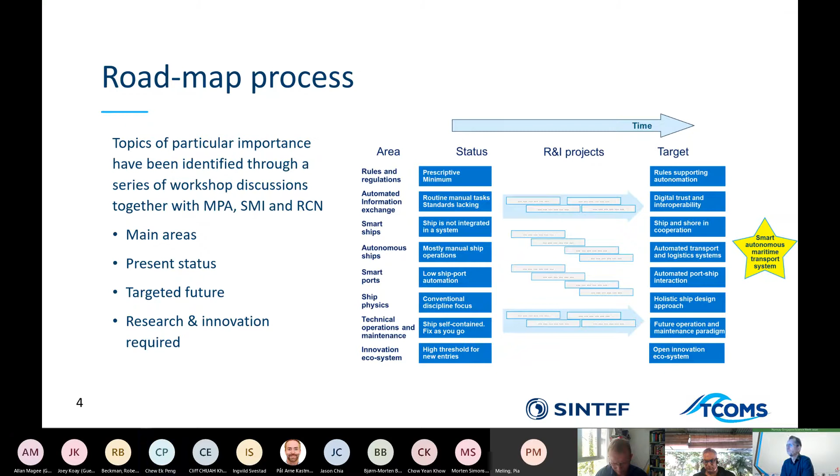So together with MPA, SMI, the Research Council of Norway, TCOMS and Sintef sat down through a series of workshops to formulate what we saw as the main areas of this coming development, and to share and communicate a common picture of development needs in that area. We tried to formulate a very tabloid status description. Where are we today? Where do we want to go in a given time perspective? And then we tried to formulate which development, research and innovation projects were required to move the industry from present status onto this targeted future.

So the next slide is the complete roadmap. As you can see, it's extremely busy. There's a lot of information in this. What I thought I'd do in this presentation is take you through each of these areas in the left-hand column, and discuss a bit on each of these areas what forms the R&I projects that we have projected in the middle part of this roadmap.

As with any kind of roadmap, the question is whether the roadmap or the process is the most important. But I believe that a common roadmap like this could also have quite a lot of interest, and it is a backdrop for sharing development processes and projects between many different actors worldwide. So the main areas: when we started looking into this, it was actually quite easy to come up with a consensus description of the dominating areas.

Of course, rules and regulations are totally critical in order to make such a change for the industry. International regulations, regional regulations, local regulations, and especially if you're looking at world trade, then this process towards common unified rules opening for autonomy for deep sea shipping could be the most challenging one. But rules and regulations definitely have to have a large focus with respect to further developments.

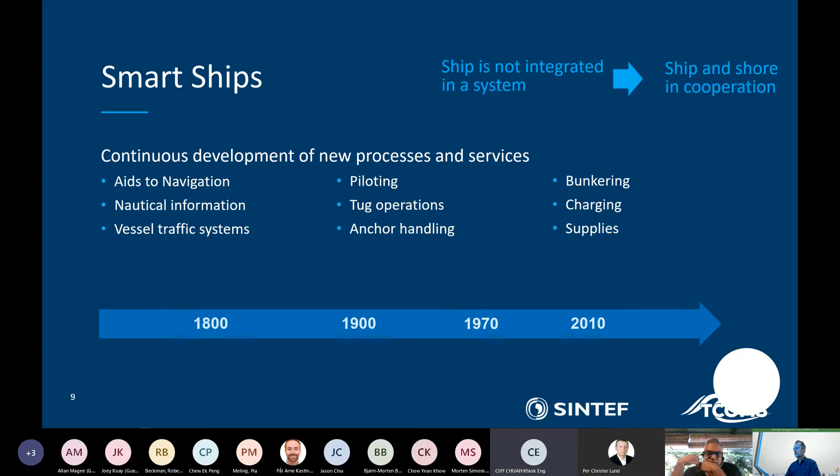Smart ships. This is the development that shipping is part of almost anyway. You can draw this timeline at the bottom from the 1800s with mechanized power, mass production of diesel engines, computerized control, and then shipping 4.0 coming. So the developments within smart ships are something the industry is well accustomed to. They've been reaping benefits from this for decades and centuries, and it's not going to stop. Autonomy or no autonomy, the development of smarter ships, more intelligent vessels, more intelligent communication is just the way this whole industry is moving.

Looking at this general part here, it's moving from ship as a separate entity more and more towards ship and shore in cooperation, and ship as a part of a fleet or as a part of a complete logistic system.

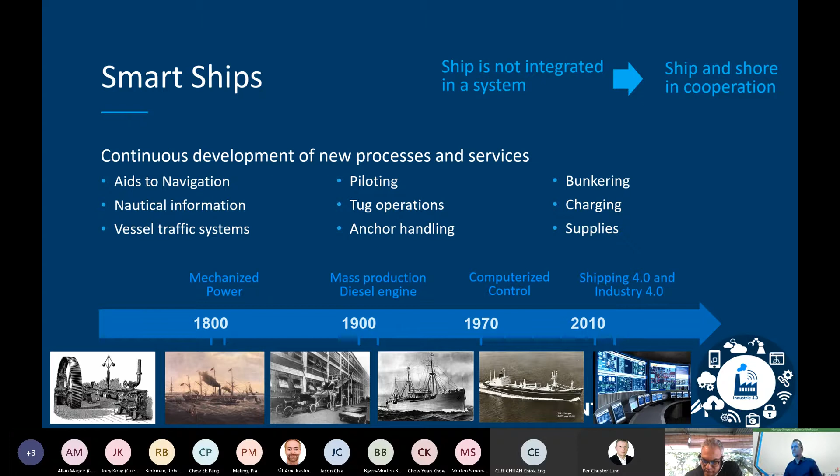Then the difference from autonomous ships, moving from manual ship operations to more and more of an automated transport and logistics system. Remote control centers for each ship owner, fleet operator, local control centers in each of the major trading hubs, local services supporting the remote control centers. The whole different way of setting up offices, setting up the internal communications.

Then, of course, sensor systems on board ships, aids to navigation, collision avoidance, and automation of a lot of the operational parts, automation in harbors, tugs, anchor handling, cargo handling. There's a whole range of developments that have started, are underway. For many of these areas, it's not fair to say this is something we see coming in the future. A lot of this is already well underway and has reached a piloting stage in quite interesting areas.

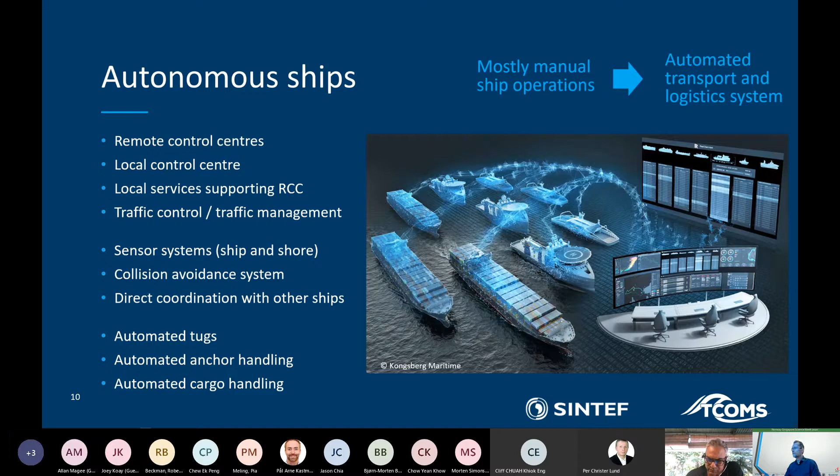And then, of course, the ports are the key to harvesting the full benefits of autonomy. In general, there is a low ship-to-port automation. Singapore is perhaps an exception in that. But then moving the whole trade to automated port-ship interaction would take quite a bit longer time.

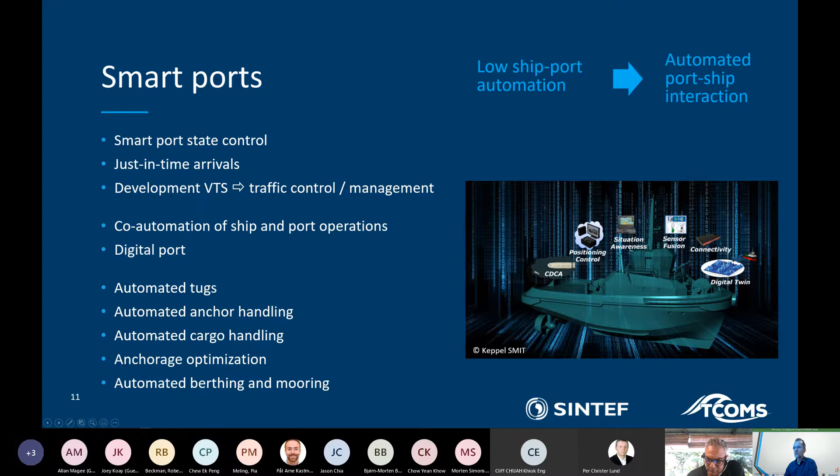But then automation of the port state control, perhaps what's most important is this planning of just-in-time arrivals, good traffic control, traffic management systems, co-automation of ship and port, digital ports, and then automation of the different operations, ship physics, digital twins, open simulation platforms, models for operation, models for ship-shore interaction, moving from a conventional discipline focus to a more holistic ship design approach.

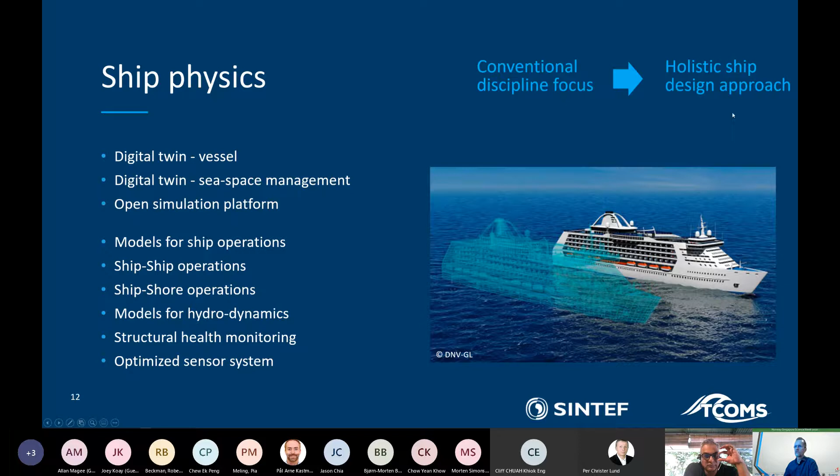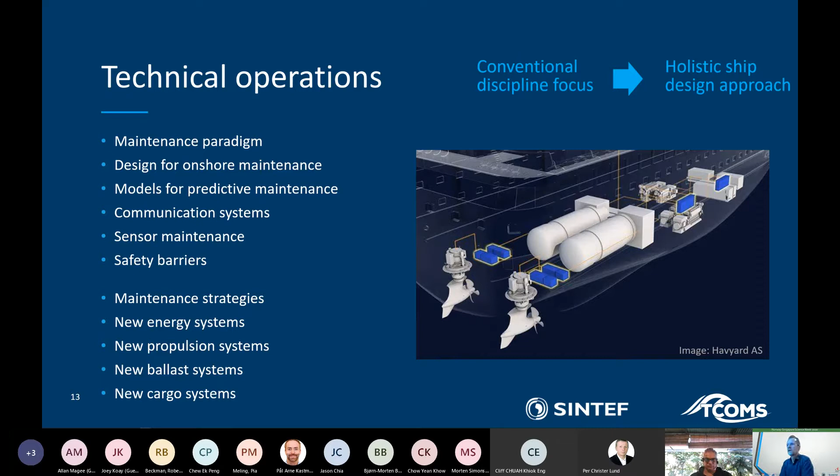Technical operations will have to involve a new paradigm for maintenance, since the ship will not be manned en route. The people continuously checking, double checking, doing all the smaller stuff will no longer be there. So the whole thinking of technical operation will need to be redone.

So there's obviously a possibility for standardization, a possibility for new services, a possibility for new companies moving into this new world. At present, we see a very high threshold for new service companies entering the scene. There is a potential with this transition to autonomous vessels that a totally new and open innovation system can be established.

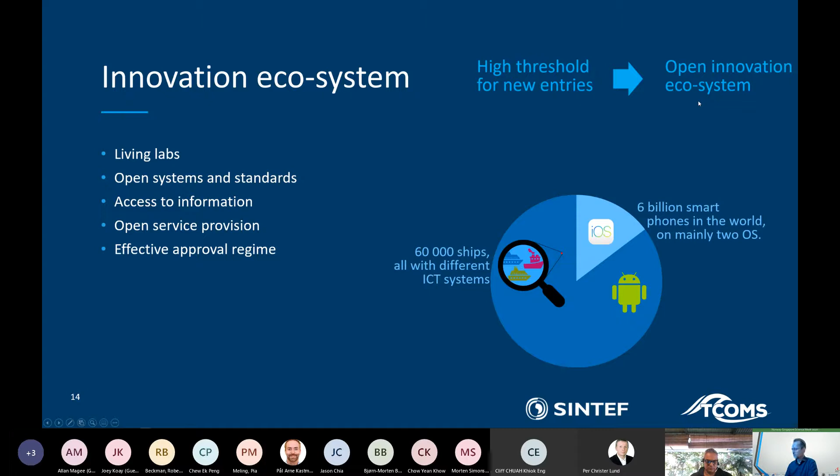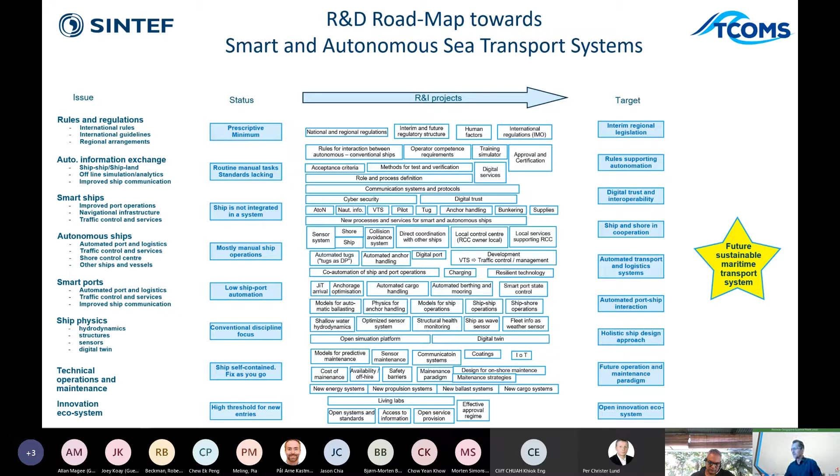And if we all move together and focus in on where each of us can really make a difference, having such a common perspective of how to move forward could then be a very valuable tool for coordinating information and for coordinating development projects in future.

So this was a very fast recollection or run through of a quite extensive work. I encourage all of you to download the full version of this roadmap from the websites of Sintef or TCOMS.

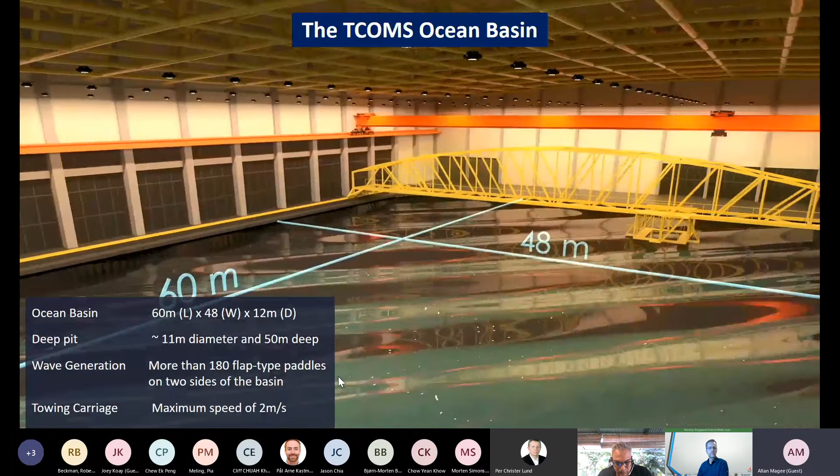A key component of TCOMS is the ocean basin, which is one of the largest in the world—I think second maybe to Sintef Ocean in Norway. It has a movable floor with a central pit that can go down to 50 meters water depth, so we can simulate deep water risers. It has an XY towing carriage, which can be used for towing and maneuvering simulations. And then we can generate waves and currents in different combinations to simulate the conditions at sea. So this is quite flexible and useful for all kinds of studies related to vessels as well as other structures floating in the sea.

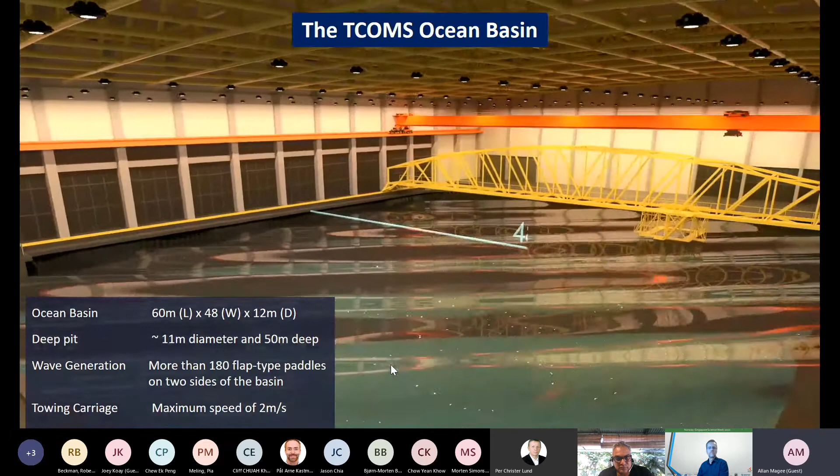As mentioned, Singapore is getting ready for the introduction of what we call MASS, Maritime Autonomous Surface Vessels or surface ships. TCOMS is working in connection with MPA, and the Singapore Maritime Roadmap includes a task on smart fleet operations and autonomous vessels, so TCOMS is working together with them. We know that Singapore's port is one of the busiest in the world—some of the largest and most advanced ships call here frequently. So Singapore has to be ready for the introduction of these new smart vessels and the technologies that are needed.

At the same time, there will be a lot of vessels entering this area, so in order to make those vessels safer and more efficient, we need to understand how they behave better and be able to predict things like vessel interactions in very tight operating environments around Singapore Straits. At the same time, we need to have some capability to assess the structural health of the vessels as they sail, and this will become more challenging with reduced manning.

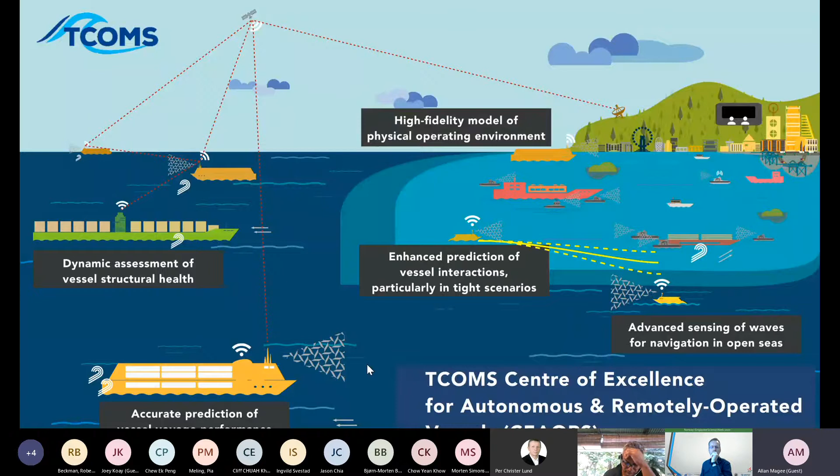So a lot of operators are looking at smart technology monitoring systems which can actually enhance safety and reduce the need for frequent periodic inspections. This can make ships more economical as well as safer over time. So these are the three things I will focus on in more detail in the presentation.

So how can we achieve this level of experience and good seamanship using an autonomous vessel? That's a very big challenge, and I think there's a lot of ship physics that need to be understood in order to reach that point.

This is some of the work we've been carrying out at TCOMS, building a captain's experience. Knowing that if you have an autonomous car, the environmental loads are relatively small, whereas with a ship operating in large waves, the inertial loading is very important and needs to be included in the model of the autonomous vessel.

Ships also take a long distance and time to maneuver. Up on the right, you can see the effect of current on a container ship executing a turning circle. On the left, you see the effect of a 1.5 knot current, which you might experience in Singapore.

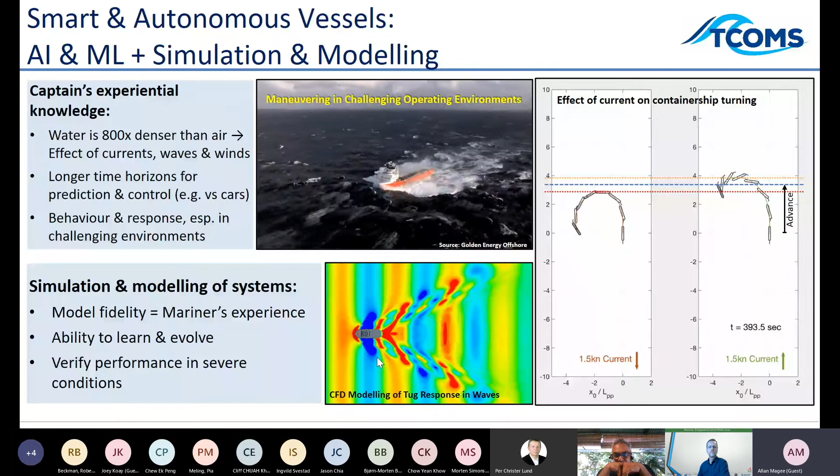A captain on board today is well aware of the situation and able to make corrections, maneuvering safely through experience. But for the autonomous vessel to capture that behavior, we need to understand a lot better how ships behave and also the effect of the environment.

Part of the development involves building a so-called digital twin of the hydrodynamic environment. This takes as input some of the global weather models for boundary conditions, and then provides simulations of environmental conditions around Singapore, eventually heading out into the South China Sea and perhaps other areas.

This could be useful for predicting, for example, whether there's a strong current today, and how that will affect vessel behavior as it enters into this very tight environment, so that we don't get any surprises or unexpected behavior.

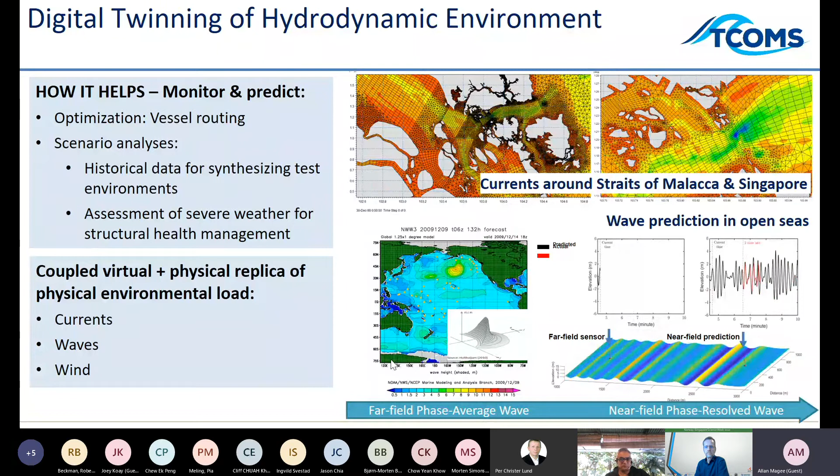This will be especially important when we have a mixture of autonomous and conventional vessels operating in very close quarters. So the physical model feeds into the digital hydrodynamic twin of the vessel to understand how it responds to the effects of the external environment.

We've been building hydrodynamic models for various types of vessels based on computational fluid dynamics. These are very large-scale simulations that take place on the National Supercomputing Centre, so they're really too vast and too slow for real-time controls.

So the way we manage this is we build data-driven, or reduced-order, models that capture the essential behavior in a few lines of code. This can then predict and be used to control the vessel under the influence of the complex environment we saw in the previous slide.

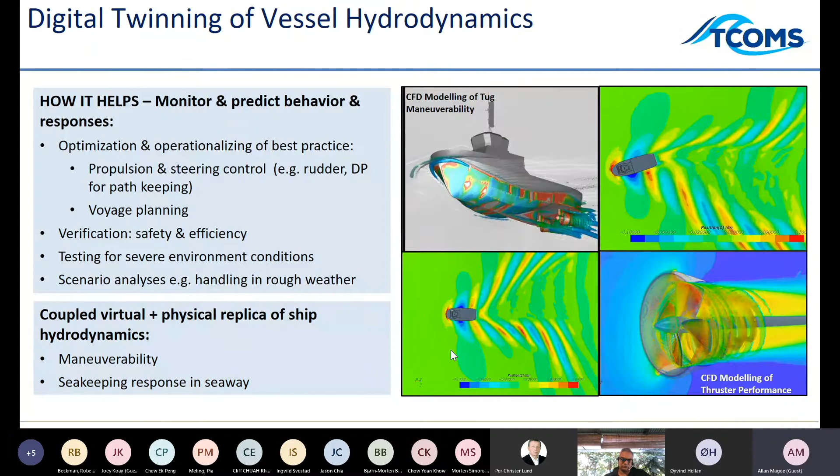Effects of vessel maneuverability, the interaction of hulls and thrusters, and maneuverability in calm water as well as in waves - this is one of the big areas that TCOMS and Sintef Ocean have been working together on for quite some time now.

As I mentioned, with reduced manning on board, you don't have people to understand the condition of the vessel. So how can we make sure it's safe after a storm goes past? Do we need to make repairs, or is it still safe to continue safely?

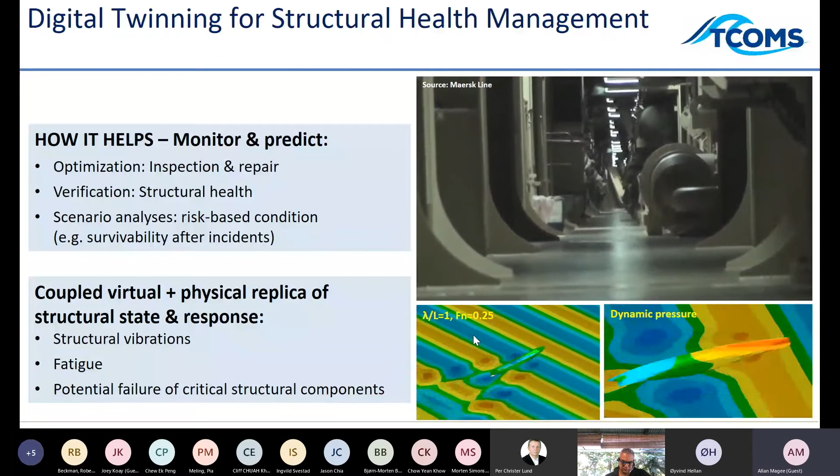This will require onboard sensors to monitor vessel behavior, as well as what we call a digital structural twin, which can predict the stresses throughout the structure based on a limited number of measurements. This can also help with long-term fatigue monitoring and provisions for dry docking, so we can know which areas to inspect first, depending on what seas and loads the vessel has experienced during its sailing.

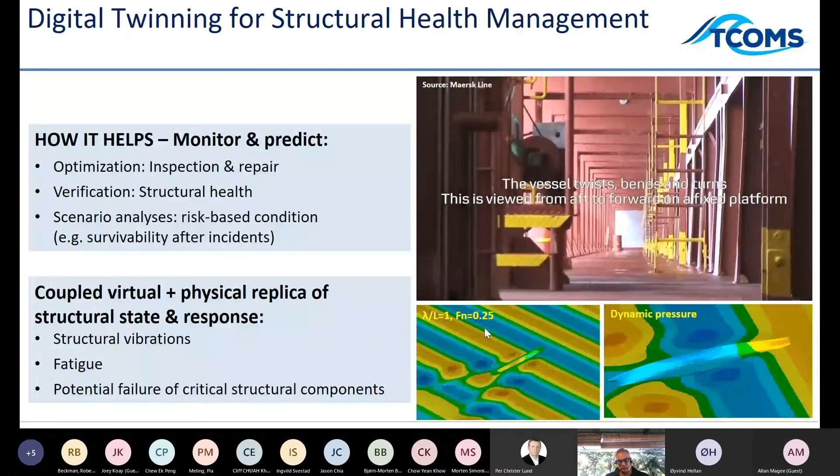So just to sum up then, the digital twin couples a virtual and physical replica of the real world system. It uses monitoring and prediction to enhance the understanding of the vessel behavior in harsh environments and in day-to-day operations. So it can be used for optimization, for verification of different monitoring systems. It can also be used to help

improve the operation. So, for example, if we can capture best practices from some of those experienced seamen, then we can perhaps gain knowledge about how to maneuver safely in more harsh environments, or how to operate more efficiently over time. So all of this requires a much better understanding than the conventional engineering that's used to design ships today. So TCOMS and Sintef Ocean will continue, I think, on this journey for some time to drill down and really develop the tools that are needed to enable this technology going forward.

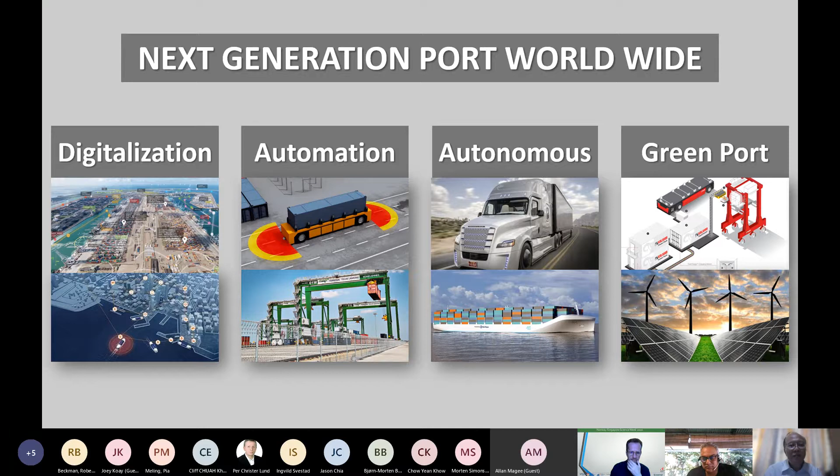So, like, what happened? Hold on. Somebody is trying to share. Is that, no, that's not you, right? No, okay, let me try to share again.

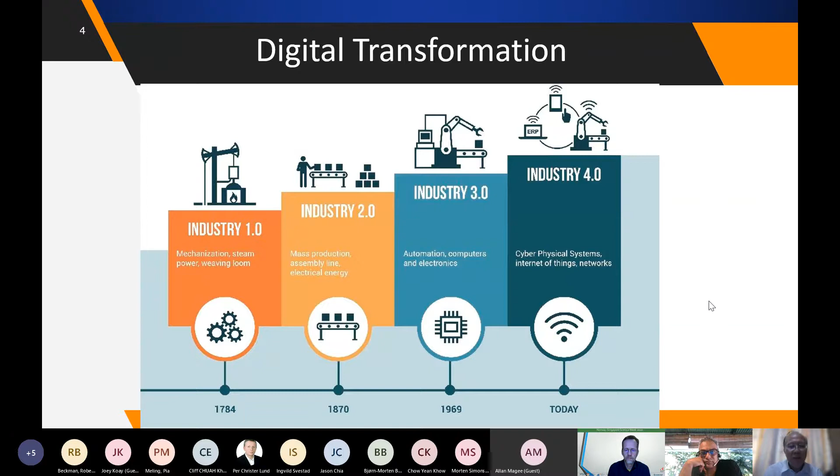Okay, so in this talk, I will focus my discussion on digitalization, especially in the area of digital twin, which was discussed just now, but this is more in terms of the next generation ports. And of course, we know that Industry 4.0 has made it possible for this kind of digital transformation. So I'm sure many of you know what a digital twin is. It's actually the digital manifestation of physical systems.

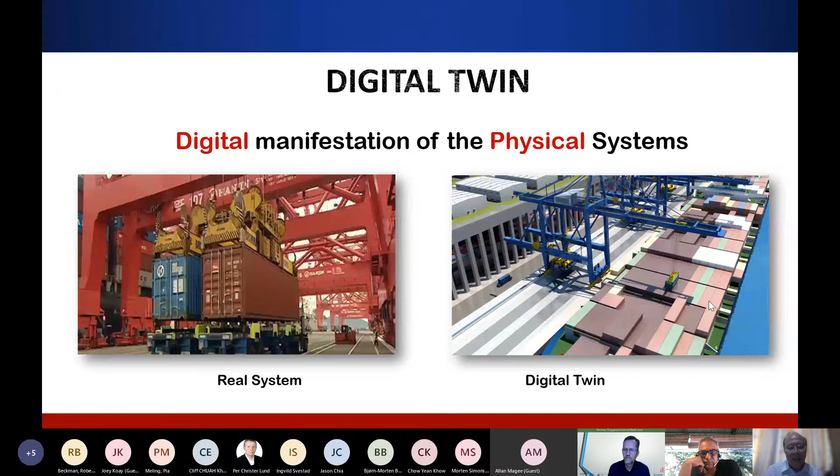And in order to build a digital twin of the port, we will need to model the actual dynamic behavior of the port, and hence the understanding of the port processes and the operation strategy, how they interact with each other, and the events taking place are necessary. So I'm sure many of you also know why digital twin is used. Industry 4.0 is an enabler, and so it's a key for digital transformation of many industries, and it's also getting increasingly popular as it's seen to drive many innovative solutions and to increase performance and profitability.

So the drivers that support digital twin development are that today we can see greater connectivity with more sensing through the IoT, cheaper and faster computing and storage, allowing for more powerful analysis and operational improvement, as well as faster communication, like the newly introduced 5G technology. And new automation technology, like Internet of Things, big data, and also use of artificial intelligence are important enablers to create a digital twin which can help the next generation ports to be efficient and smart.

So we know that there are many perspectives of what a digital twin is. Just now, Allan has also shared his part of the digital twin. So as we can see, a digital twin could be just a simple 3D model with IoT that shows the information of the system state, or in a more advanced model, data is collected to be used to describe the behavior of the system, like what Allan mentioned about collecting data to understand the dynamics of the system and then learn from there, where machine learning is applied to the historical data to provide information on future trends.

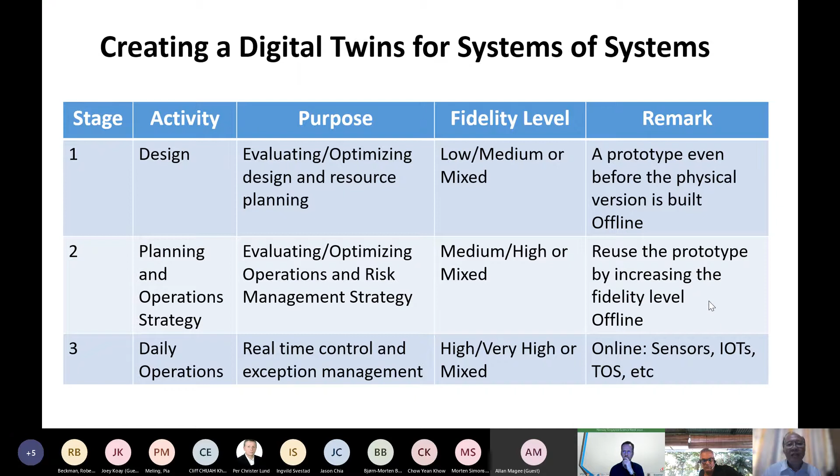So it should not just be a twin, but many twins for the same system, and it depends on the purpose. For example, if you can see, there are various activities when you design a digital twin. It could be for design, for planning the operations, for daily operations. So each of them have different purposes. And depending on the purpose, the fidelity level can be low or it can be high, right? So essentially, what I want to mention is that we don't just build a twin, but there will be many twins depending on the kind of study or the purpose that we want to have this digital twin perform.

One of the opportunities in having a digital twin is in the area of simulation analytics. So in the physical world, we know that we are bounded by space and time, and also the type of data that we can use to learn. But in a digital twin, these boundaries can be relaxed, and we can perform many types of scenarios, some of which have not happened yet. Moreover, we are not bounded by time, and we can get the answer within a short time.

Usually, when we try to understand the future trend, we use a machine learning tool, for example, to regress on the historical data to determine the pattern. However, it will not be able to extrapolate accurately if the points are beyond the limits. It will only work well within the limits of the historical data. So this is where the digital twin can help, as it is not only able to learn from historical data, but it has the capability to generate scenarios that have not happened before.

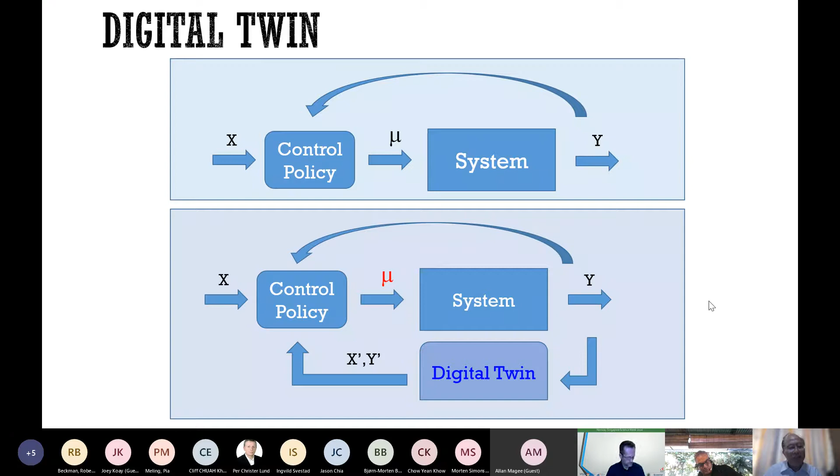Learning only from the historical data will not be effective because this method is reactive, and this type of learning has a lag effect. So it means that we are always chasing after the solution. The digital twin solution can actually help to address this because it makes the system anticipative by generating likely scenarios and evaluating the impacts of these scenarios before they can happen.

So in summary, the digital twin takes information from the historical data and current data from IoT and TOS, the terminal operating system, to show the system states and the impact if certain decisions are taken. It can also generate future optimized data from the scenarios generated from the digital twin. From these sources of data, they can go into a learning model to map the optimal decision space with different scenarios. This optimal decision space will be the super brain that can provide feedback to the decision makers with these scenarios. Hence, we are actually learning from the future for the future.

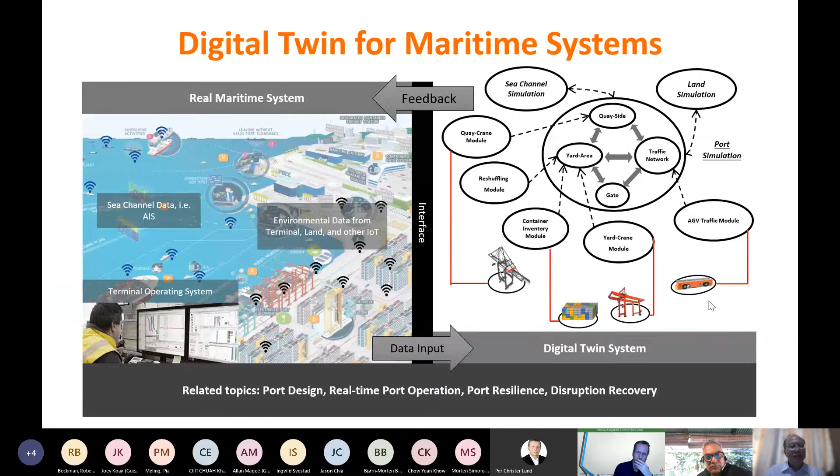So by using simulation analytics, the digital twin will be able to work hand in hand with the physical system to help the next generation port to be efficient and intelligent. As mentioned by Dr. Sanjay Kuttan, we have a Center of Excellence in Modeling and Simulation for the Next Generation Port, or C4NGP in short, to take up the challenge of developing this port digital twin. C4NGP is supported by the Singapore Maritime Institute, a government funding agency which has developed the Singapore Maritime R&D Roadmaps 2030 to identify capabilities needed to ensure Singapore's long-term competitiveness in the maritime space.

So C4NGP has developed an open source simulation platform called the O2DES, which is embedded with simulation optimization technology. Our digital twin will be built on this platform. Besides using discrete event simulation as the modeling technique, we have also embedded simulation optimization technology in the platform. They are the optimization in simulation, simulation optimization, and simulation analytics. Each optimization engine has its role to play. For example, optimization in simulation optimizes on the best operation strategies to be used. The simulation optimization helps to identify the best design configuration, and the simulation analytics helps to make decisions in real-time operations.

So our digital twin will sit on top of this platform, and it will be supported by visualization, such as a dashboard and 2D or 3D models to give insightful information. In addition, on the right side, we're also creating what I call Port XML, which is a universal markup machine language that can specify the configuration of the port. And by doing that, you can help to accelerate the model building of the port digital twin.

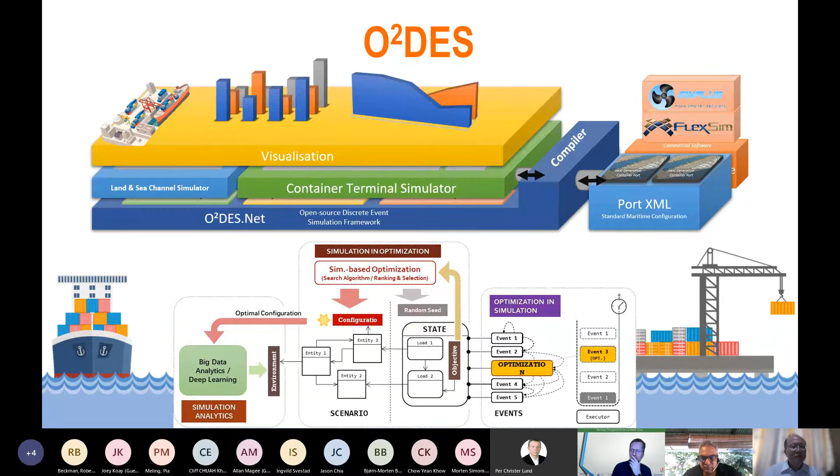So I would like to share with you two of our recent C4NGP initiatives. The first initiative is the Port XML standard, which I just mentioned is a set of universal markup programming language for configuration of the ports. In order to establish it as a standard, we have recently set up a Port XML Alliance. The Port XML Alliance will comprise academia and researchers, developers, companies from the port and maritime industry, and port authorities. With this critical mass, the Port XML Alliance will seek to push this markup language to be adopted as a new international port and maritime machine language standard supported by international organizations such as ISO or the United Nations.

Here is the example of a Port XML standard, which shows the markup language to describe a yard block. So this is essentially what we are trying to push with this standard. And of course, there are benefits by pushing these standards. First is that it can help to accelerate the building of the port digital twin, and hence cut down on time, improve labor efficiency and reduce operating costs.

Second, it will establish a common working platform to enable compatibility among all stakeholders in building digital twins in the maritime and port industry. And the third one, which is very useful, is that it allows portability across different digital twin platforms.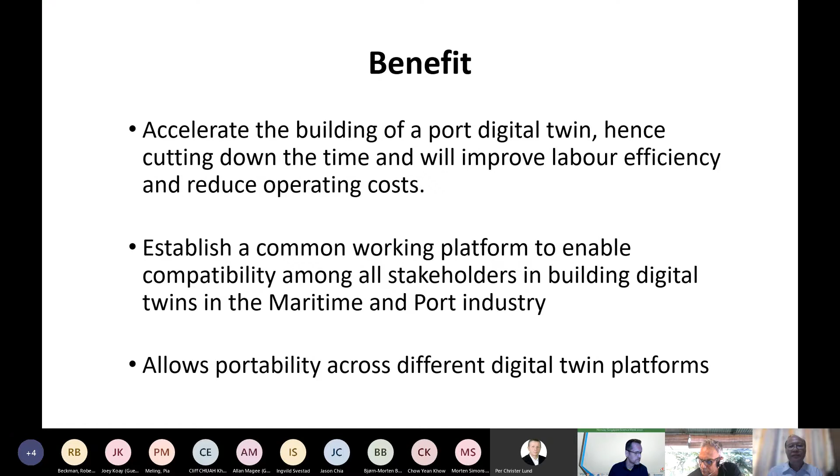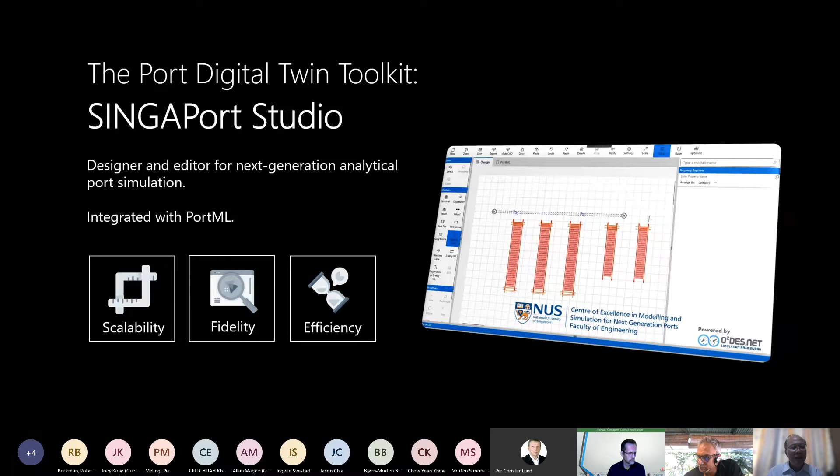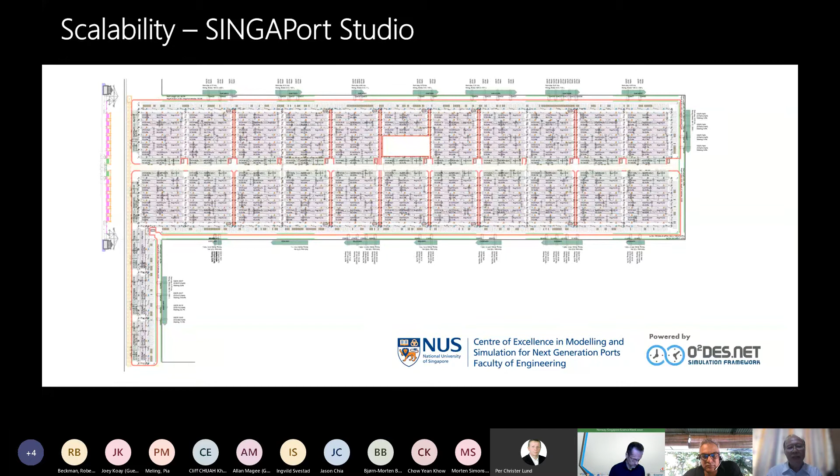The second initiative is the SINGAPort Studio. The SINGAPort Studio is our in-house built software tool to support the model building of the digital twin model with user-friendly interfaces. It contains libraries of port modules interfaced with the O2DES.NET platform and built around the PortML standard. It is scalable. For example, for the digital twin of one of the fingers in Tuas, it takes 5 minutes to compute for one simulation day, which contains millions of events to run.

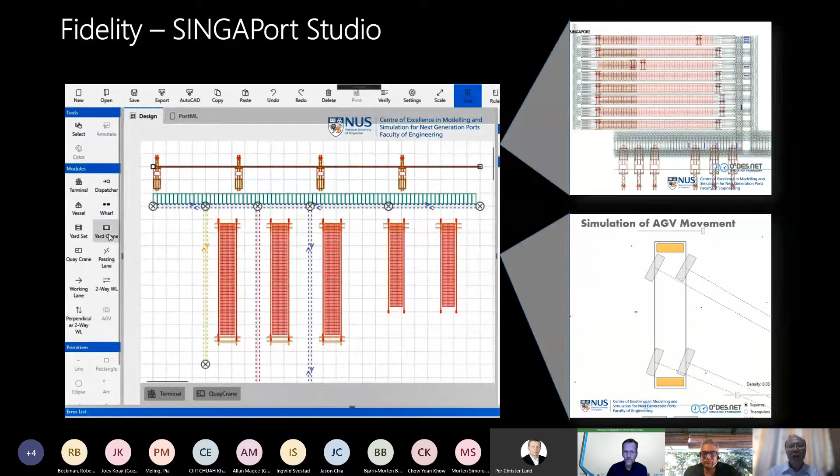So SINGAPort Studio also allows the digital twin to be built at different levels of fidelity. For example, for a quay crane, you can actually model it by looking at the actual movement of the trolley, the acceleration, the deceleration, the actual dynamics of it. On the other hand, you can also model the quay crane as just a distribution of the cycle time of loading and unloading. So it can have a high fidelity and low fidelity level as well.

Third, the SINGAPort Studio is built to be efficient, and as the modules are detachable, reusable, and reconfigurable, it allows the digital twin to be built faster. It's also designed not only to evaluate a design, but it's able to find the optimal or good design.

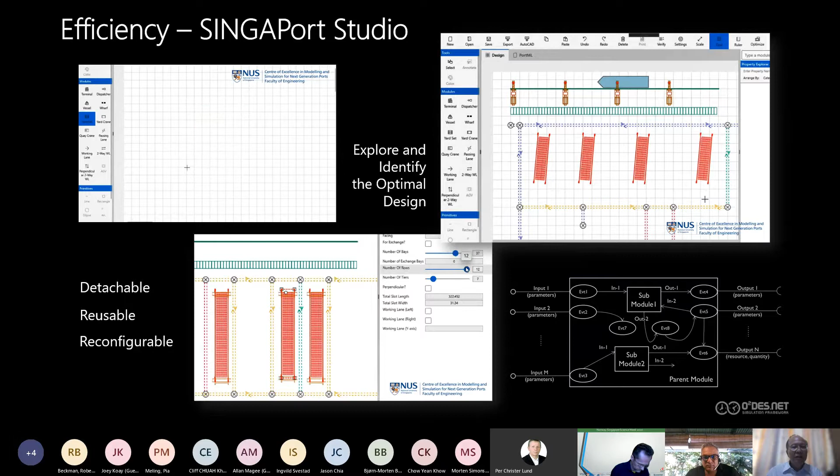As mentioned, the SINGAPort Studio is built around the PortML standard. It is able to read the PortML of a port and convert it into the port digital twin. And if the port digital twin is built by the SINGAPort Studio, it will be able to convert it to the PortML of that port.

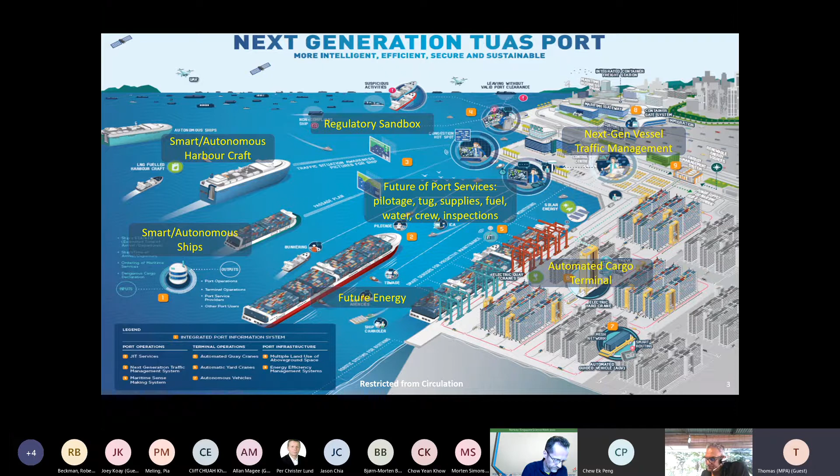And therefore, today, a lot of these MASS-related projects are actually relating to harbour craft. And we believe that these harbour craft projects will give us very useful data, learning and experience in terms of the challenges and the new concepts of operations that are possible. So to take one step forward, we also set up a Living Lab together with our partner port operators, PSA and Jurong Port, to try out different concepts of operations.

On the MPA end, basically what we set up is, I would say, on 3 fronts. One is the regulatory sandbox. Basically, this is a set of guidelines to guide companies towards testing of smart and autonomous ships. We also set up digital and physical infrastructure. We don't have the luxury of space in the port waters to allow a dedicated area for autonomous ship testing. But we do demarcate some of the areas at certain times so that certain testing could take place progressively. So that's on the physical front.

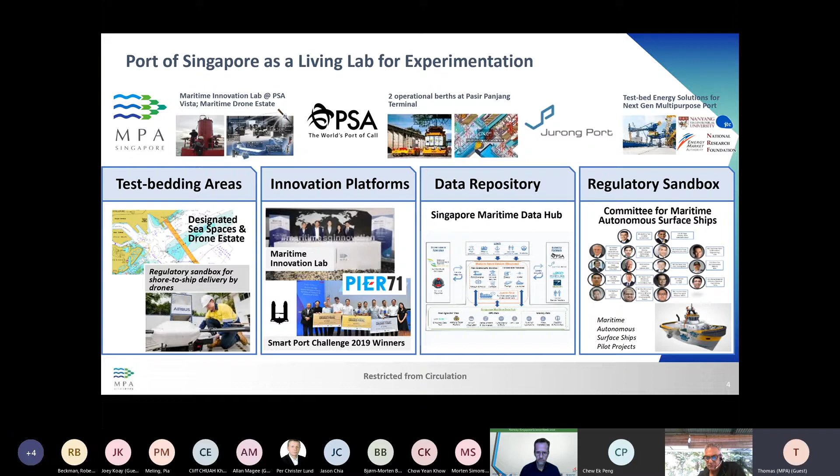And on the digital front, we have been trying out different communication technologies with different providers, and also set up the data hub to allow access to historical data as well as existing data in terms of ship location, navigation, speed, course, because at any one point in time, there are like 1,000 vessels in the port waters. So these all provide a lot of very rich information and scenarios for companies who want to do modeling simulations; they can use some of these data to try out their algorithms.

So in terms of how we look at it, not just MASS, but the smart ship value chain, there are many stages of development, and definitely lots of opportunities for researchers and tech developers to look into. And the very important first step is definitely use case identification, because that defines everything. You need to choose the right use case where it brings value to the users, to the stakeholders involved. Not just doing autonomy for autonomy's sake, but it must really bring benefits.

And I think many of us agree that today the conversation is not so much about removing the manning from the ship, but focusing a lot on enhancing the safety of the ship and the crew, enhancing sustainability and emission reduction, and also productivity and cost reduction. More from those angles when we look at the subject of autonomous shipping.

And once the use case has been identified, then it comes to what the future new concept of operations is going to be like when the ship comes into the port in terms of taking services and doing all the regulatory reporting. I think today a lot of the load is on the masters, the crew, and the shipping agents to do a lot of reporting, a lot of coordination of activities, a lot of communication amongst the different parties. So to bring value to these people who are facing challenges and problems, we believe autonomous shipping must not only look at autonomous navigation technology alone, but also at a lot of other aspects in terms of communication, handshaking with the shoreside operation, the coordination between masters and the port, and many other aspects.

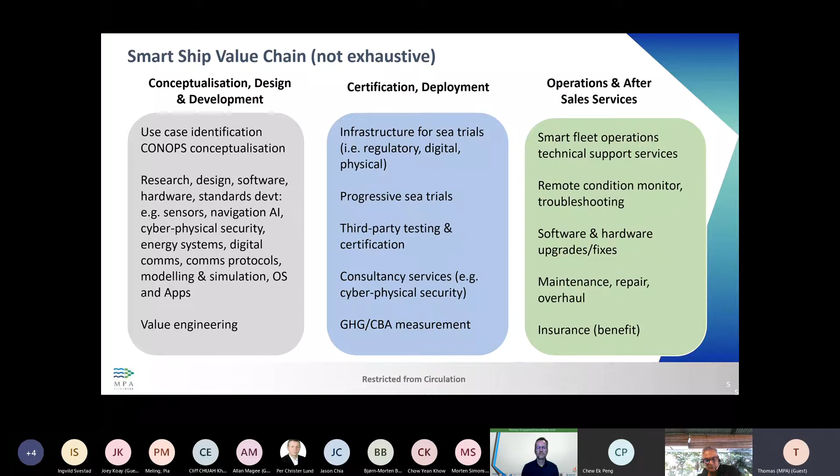sea trials. And finally, after deployment, of course, there will be operations support and after-sales services to support the smart ship operations. And these are all the so-called business and technology development opportunities. I would just say that this is not an exhaustive list of services that are possible.

Let me move on to the progress of the projects in Singapore. Just now I talked about how a lot of our projects are focusing on harbour craft, mainly in these two classes of vessels, which are the tugboat and the flotsam vessels. These are basically small crafts that collect rubbish and garbage floating on the waters. And for clear reasons, because it provides a good value proposition.

Today, I think the crew on the tugboat, besides operations, also spend a lot of time in the waters navigating from point to point. So most of these projects involve autonomous navigation with collision detection and avoidance, navigating from point A to point B. And some of these projects have actually successfully completed. Of course, some of the technology they have incorporated includes AI, sensor fusion, all those things.

What is probably not in place yet is wider-scale deployment, because today I think the cost of deployment is still quite high. While the concept of operations is proven to work in terms of collision detection and avoidance, the cost of deployment is at the stage that the operators still need to overcome this issue, and hence there's a need for value engineering to reduce the cost of the autonomous technology.

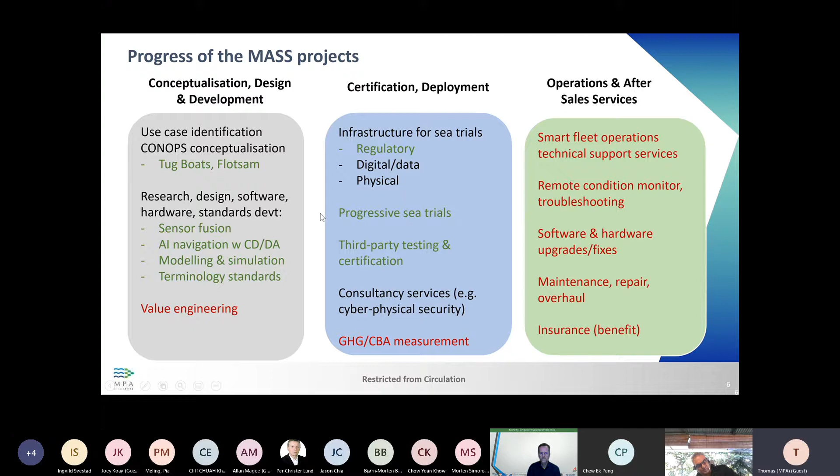In terms of the things that we put in place, I have colour-coded them. So basically, the green ones are the developments in Singapore that more or less we have already done. We have achieved some progress in those areas. Those in black, I can say, are still a lot of work in progress. And those in red, we have not reached that stage yet.

And it's not just only about the development in Singapore, because ultimately when companies do technology developments and operators deploy new technology, they also need to know that whatever they have invested in is not only for one single port. And therefore, we also set out to align and harmonize a lot of this discussion with like-minded ports around the world who are willing to be involved in this MASS discussion.

We set up a MASS port network with various ports around the world to basically look at the development of detailed guidelines and conditions for MASS trials and testing in the port, and to establish common terminologies and communication standards for ship reporting and data exchange. Basically, it's to allow interoperability when one vessel needs to call at not only the Port of Singapore, but other ports.

And we also want to facilitate a possibility where, if any companies in future want to do a port-to-port call between two ports to test out their MASS vessel, these are the ports that will be more ready to facilitate such a sea trial.

And this is my second last slide. Some of you are aware that Singapore and Norway, every 2 or 3 years, run a joint R&D grant call to incentivize the research community from both sides to do joint projects. And from our end, we also set up centres of excellence in various areas of the next generation port, as Prof. Chu has shared. In the area of autonomous shipping, we have set up a centre of excellence for autonomous and remote operations under TCOMS at NUS, which also jointly published a roadmap with SINTEF, as mentioned earlier.

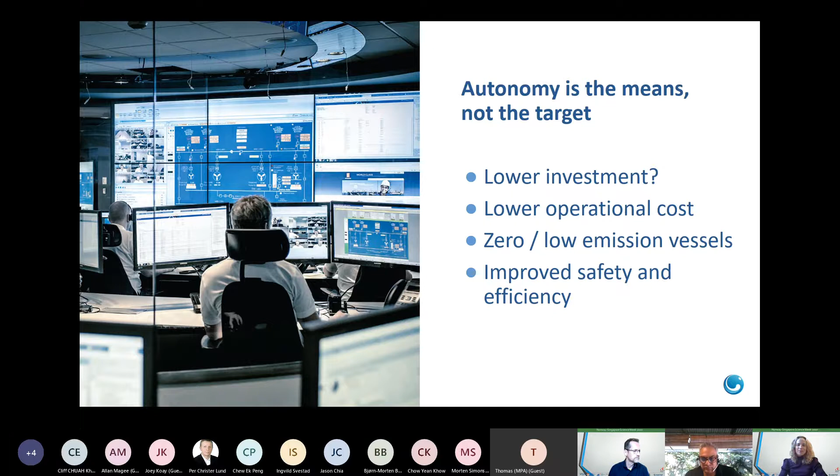And then one can discuss the safety aspect, has been mentioned before as well. There's quite a lot of accidents today that are due to human error of some kind, and at least those might be reduced, while of course we are introducing new risks as well. We have to be aware of that. But we believe this could definitely improve safety and efficiency as well.

But it's level 4 we're looking at, and we are cooperating with not only the authorities and the individual class societies, but also the University of Southeastern Norway, specifically on what competencies are needed in the Shore Control Center or Remote Operations Center. So actually they are now starting a curriculum. We will test it with a few people now already in November on a specific training program for Shore Control Center operators. So we're getting into more practical details.

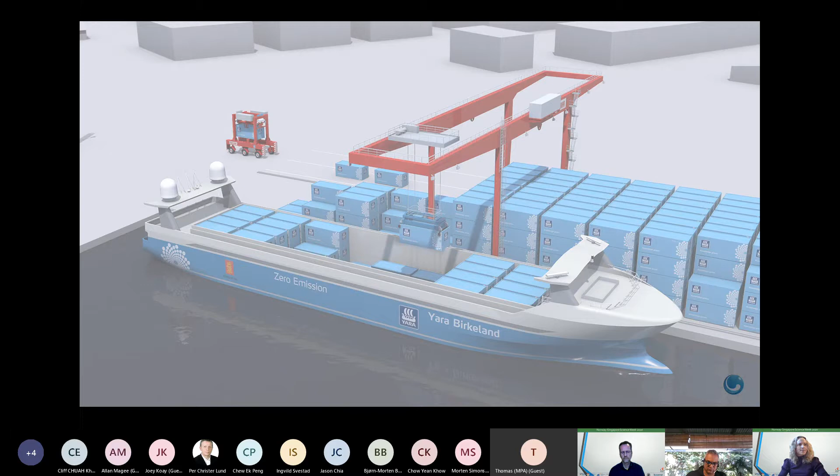You have probably all heard about this vessel. It was the world's first unmanned container vessel, zero emission. It was launched by Yara, the fertilizer producer. It's quite an ambitious project. It has been a little bit delayed because of COVID, but it's now going ahead.

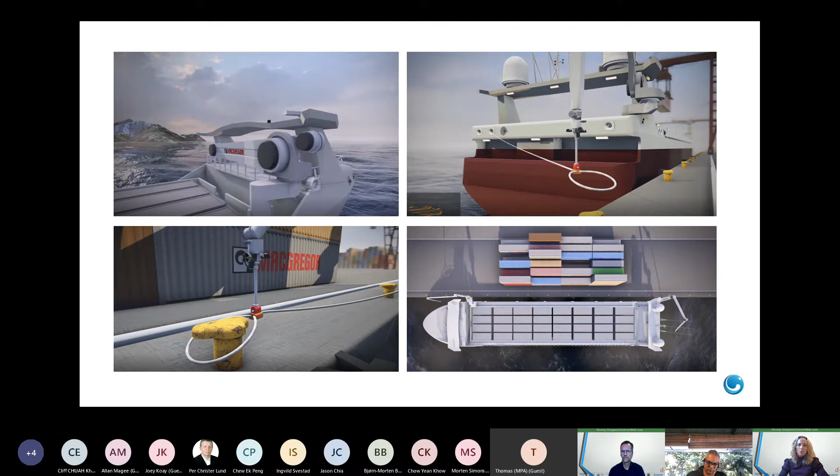This is an example of another task that has been automated on board this vessel. MacGregor has delivered a robotic arm that will do the mooring instead of people doing it. This is probably a one-of-a-kind solution at the moment. There are already different mooring solutions that require port infrastructure like vacuum or magnet mooring, but this would work in any port. That's the idea.

The vessel is now in the Vard yard in Norway, in Ålesund, where she's undergoing sea trials. Very soon she will be ready for the first tests, but it will still be a while until Yara can put her into operation, because they need to finalize their port side investments and changes as well. But the vessel is soon ready for testing.

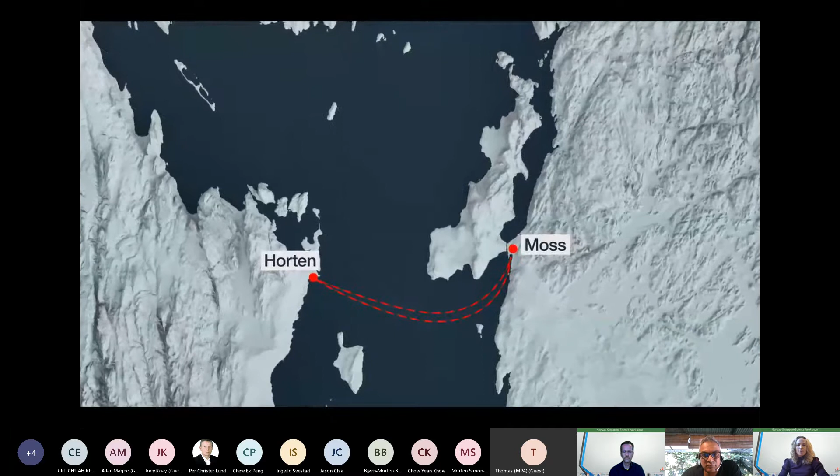Now this one is another cargo owner called ASKO. It's a large grocery distributor in Norway. They have around 800 trucks on the road every day. But instead of driving the trucks all around the Oslo fjord, they're going to cross here with these 2 unmanned and 100% battery-driven vessels. These vessels can take 16 trailers each, and it will be unmanned in the end, and they will be picked up on the other side by a driver and taken to the final destination.

This is quite interesting because ASKO is just a cargo owner, they have no maritime experience at all. Now they have started a company called ASKO Maritime, and they have signed contracts for 2 of these vessels that are currently being constructed in India at the Cochin shipyard. And they are becoming ship owners.

This is an example of what was mentioned earlier by Øyvind. I think this is changing the game a little bit. Instead of them waiting for ship owners to come with the solution they're looking for, they're now taking full control and they're owning these vessels.

They will be replacing 150 trucks daily on a certain distance and actually reduce CO2 emissions by 5,000 tons per year. This is the main reason for ASKO, they want to have a zero emission logistics chain. They're very concerned about their CO2 footprint, and they have ambitious targets for that. But they also see that they can get a much more efficient logistics chain.

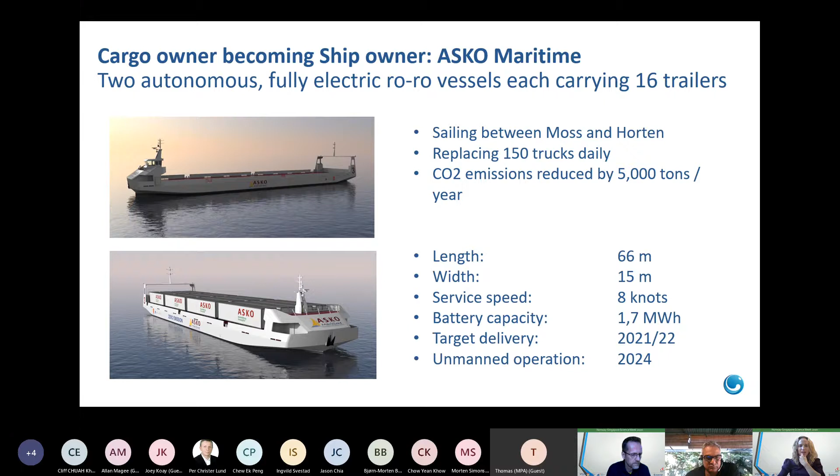And now we're doing site management, new building management, and project management for ASKO. We have to do a lot of remote supervision because of COVID, so that's also interesting, it's a new way of doing that. This is an example of disruption, that we can offer roles that were not there before in this setup.

This is a test with switcher tugs, and I know Singapore has similar testing on remote control tugs. This is not autonomous, it's one person remotely controlling one tug, but it's still a very interesting business case, because these tugs spend most of their time just waiting. Having people on board sitting there just waiting doesn't really make sense for anybody, so looking at doing that remotely makes sense commercially as well.

There are already a lot of autonomous unmanned vehicles out there, both underwater and surface, of smaller kinds, used for search and rescue, mapping the seabed, and doing different surveys. This top left one is Kongsberg's Sounder, which is also commercially used to find fish. So that's another use case of autonomy.

In Norway we also have the Norwegian Research for Defense looking at autonomous minesweepers, which definitely makes sense, because why put people into a risky situation like that? We could also look at remote controlled firefighting vessels for ports — a lot of waiting time like with the tugs, and of course a dangerous environment once you're there putting out the fire. Why put people close to flames and toxic gas?

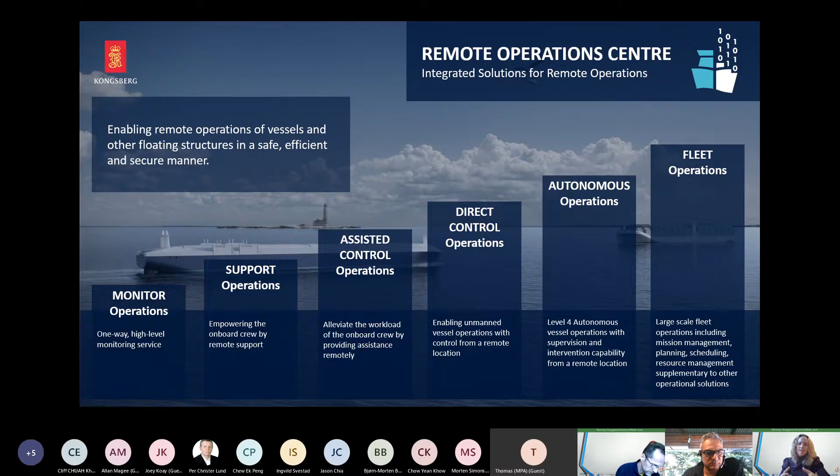In Kongsberg's facilities, they started testing this already a couple of years ago, and this is the King of Norway — he visited, very interested in the technology.

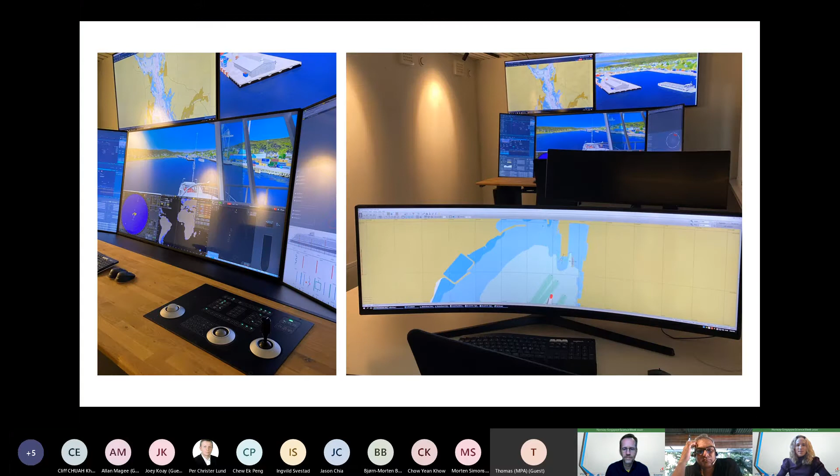Now we have set up a desk, just a simple desk inside our office in Massterly outside Oslo, where we're testing out what would be the best user interface. This is the first setup of that, where you have the bridge view here, and more of a bird's eye view in the top right corner.

We have the sea-scope, what the VTS will see, on the left top corner. And you would have a list of your vessels and their schedule here. And you would have on the right side a health status on all the equipment on board. And radar, ECDIS, and conning are mandatory views that you need to add as well.

But we don't know yet how this will be as a working environment, and we need to test that. Of course, we're doing that in research projects with various partners, but I guess the real testing will be when this ASKO or Yara vessel will be in operation and still with people on board, but we will have somebody in this remote operation center monitoring and testing how it would be to have the responsibility.

And this is my last slide as well. Also, as has been mentioned by several of the speakers, we need to focus on more than just the vessel and the sea transport. It's the whole interplay with all the stakeholders, and especially the whole logistics chain. If we're talking about goods, we need to make all of this information somehow available and optimized.

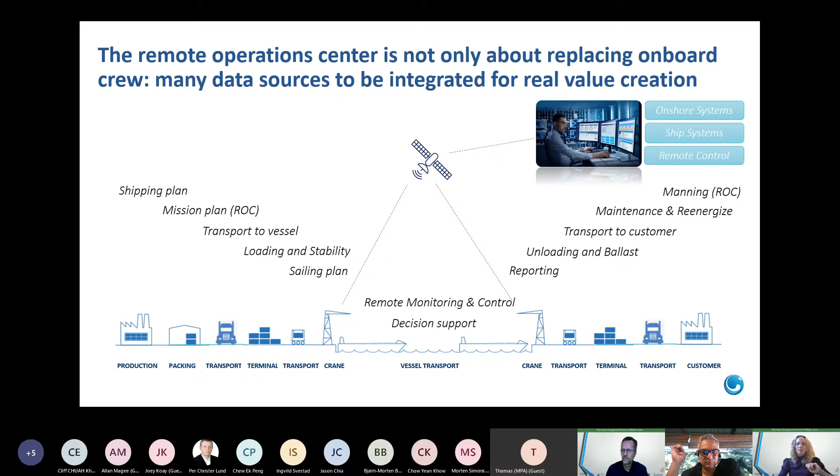And I think the remote operations center could have a good role to play in optimizing more than just the vessel transportation. So we need to collaborate with the ports and with shore transportation to make sure of this. And of course, we are looking forward to cooperating with Singapore, who are very advanced in this field, and we hope that we could get some good projects running together.

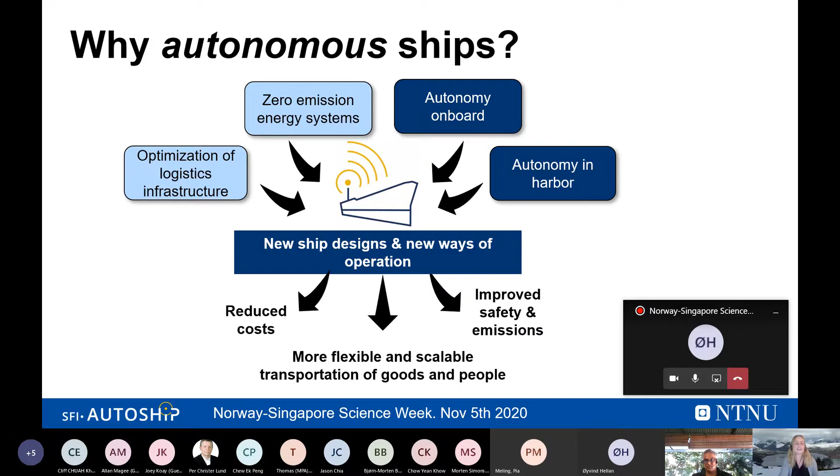When it comes to safety, a very important issue is that when you raise autonomy of ships and systems, you expect more of the safety. You will require at least as safe as or better safety level. And with autonomy, there can be new risks, but also better ways of monitoring what's ongoing. So that is also an opportunity to improve safety, because you will have better tracking of the environment and be able to have better decision support, and also the reduced emissions. So this was of course a starting point also for this research center.

So then I would like to turn the attention to the SFI Autoship as such. Autoship stands for autonomous ships. We have the short title for safe and sustainable operations. The objective is to develop and manage technology systems and operations for safe, sustainable, secure and cost-effective autonomous sea transport and operations. And why? Norway has already a strong position with internationally leading manufacturers, research institutes, academic groups, and class companies. And of course, our coast, waterways, and also the needs for international transportation give many relevant business case opportunities, if we can make them cost effective and demonstrate safety, both for ship owners and operators. And we also already have some infrastructures for testing also at sea, which are rather attractive.

We have more than 20 partners with us. We have 4 research partners: NTNU, the Norwegian University of Science and Technology, SINTEF, University of Oslo, and also the Institute for Energy Technology, IFE. From the industry partners, we have 12 covering segments from manufacturers to ship operators. Some of them are probably joining here today. And we also have some public and governmental partners. We have Trondheim Havn, which operates the ports in Trondheim City. We have the Trondheim Municipality, the Norwegian Coastal Administration, and also the Norwegian Maritime Authority. The center is hosted by the Department of Engineering Cybernetics at NTNU.

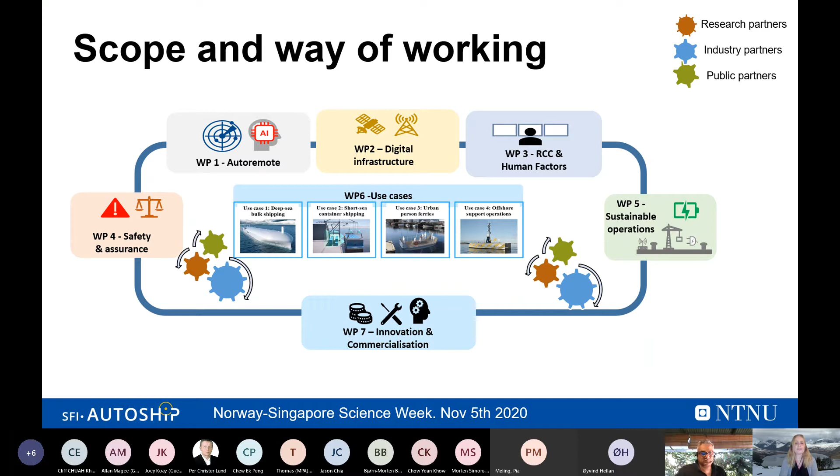The SFI relies on a close collaboration, as I mentioned, so I would just like to re-emphasize that. These are not work packages that are carried out alone by the research partners, but rely on involvement from the industry partners and the public partners through participation with in-kind activities. Then I would like to shortly say something about each of the work packages. Some of you might have some more in-depth background in some of these areas.

I will start with the auto remote. That work package will focus on developing perception and decision-making systems that will enable these autonomous surface ships to accomplish their mission, with emphasis also on handling extraordinary events. Of course, that requires attention to several topics, situation awareness and the use of sensor fusion to enhance autonomous decision-making. It relies on simultaneous localization and map building, called SLAM, and extended object tracking.

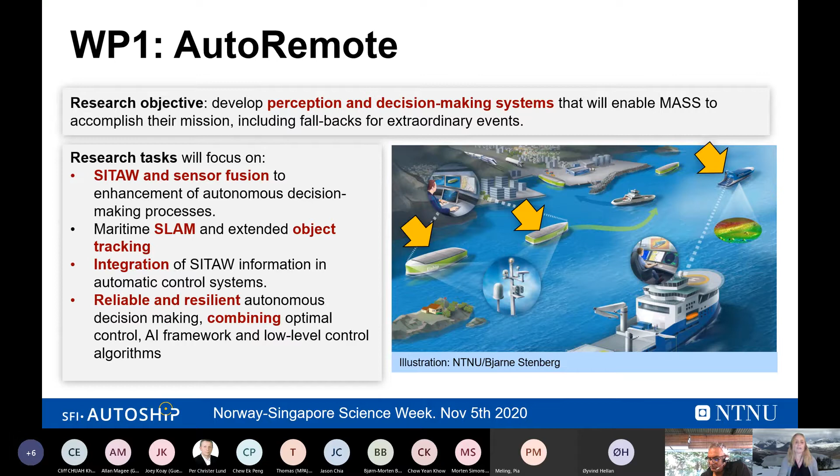Given that information, the idea is to work on the integration of these into the automatic control systems and also combining different control strategies from optimal control, artificial intelligence frameworks and low-level control algorithms together so that they develop both reliable and resilient autonomous decision making. Because as this illustration to the right shows, for some of these business cases, the autonomous ships will operate in environments where you have also other activities, many of those not being manned or trained. So this is a very critical activity, both to be able to do the navigation, but also to demonstrate the safety.

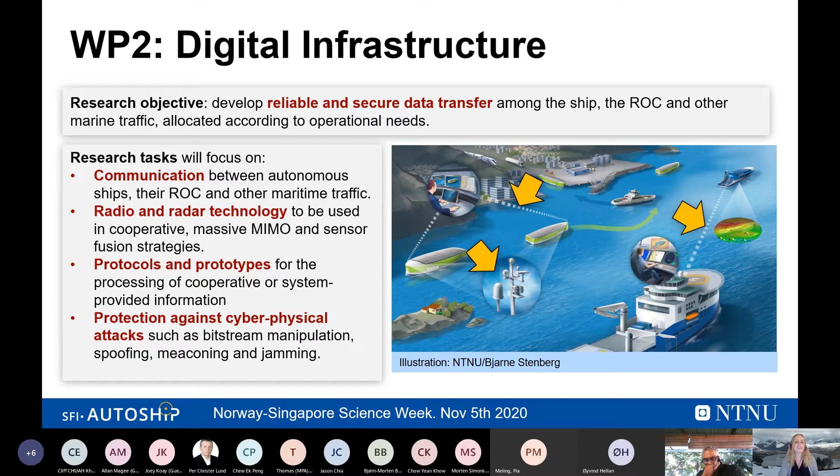Then we have a work package on the digital infrastructure. The purpose there is to develop reliable and secure data transfer among the ship, the remote operation center, and other marine traffic. Here we have a focus on various aspects. First of all, the communication between these actors. We will focus on radio and radar technology to be cooperative, massive multiple input multiple output, and sensor fusion strategies. We will look at protocols and prototypes, focus on making digital collision regulation rules, and also on cybersecurity. That will be a very important aspect of communication, since autonomy relies heavily on the availability of digital communication that is not compromised. The cybersecurity cannot be overlooked.

We have a work package on the remote operation center and human factors. I think this overlaps a bit with what Pia Meling from Massterly pinpointed in some of the ongoing activities that they are involved in. It is also an aspect we will look into in this center, to develop safe and efficient human-machine interfaces and interaction for remote operation centers. Here we will focus on the definition of how we can utilize all the necessary data on sensor fusion to give sufficient information to make a reliable basis for decision support.

We will also focus on what we have called usable human-centered design, meaning developing more insight into how you can construct these centers to facilitate different requirements for situation awareness, workload, and communication with conventional ships that cannot be overlooked. Also procedures, manning and competence, which are closely related to the above points.

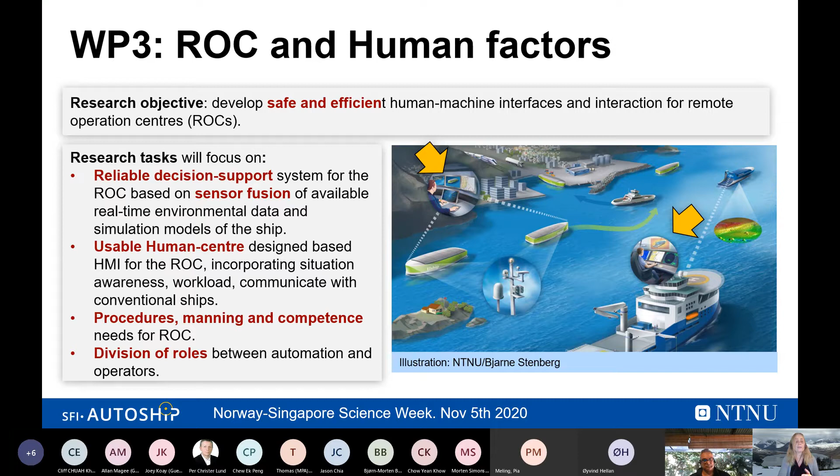And of course, depending on the level of autonomy, I think it was mentioned in the earlier presentation that we need to move to a more function-based direction in the way we define roles, because some of the traditional responsibilities and who has had the responsibility for the different tasks will of course change with this new way of operation. And there may also be a need to handle different kinds of categories depending on the level of autonomy in each case.

Then we have the work package on safety and assurance, just to restate a very important aspect when it comes to introducing technology to replace humans. We expect a bit more of the technology than we sometimes do of humans. So ensuring safety is a very critical activity.

And in this center, we will focus on research and development of novel methods, models, and tools for risk management, and safe design and operation of autonomous ships. And here we have the focus on risk management in operation, the need to decide on what type of information you will require in real time, how to aggregate and put this information together to make decision support around the risk level, and also support in how to act and also select good mitigating measures. These must be more real-time situations.

Then we will have a focus on how we can ensure that we build the safety into design, that we think about what will be the reliance on the technology, what will be the reliance on other systems. This is of course something that all manufacturers are focusing on, but we will try to develop some good principles for how this is being done within the frameworks that exist today.

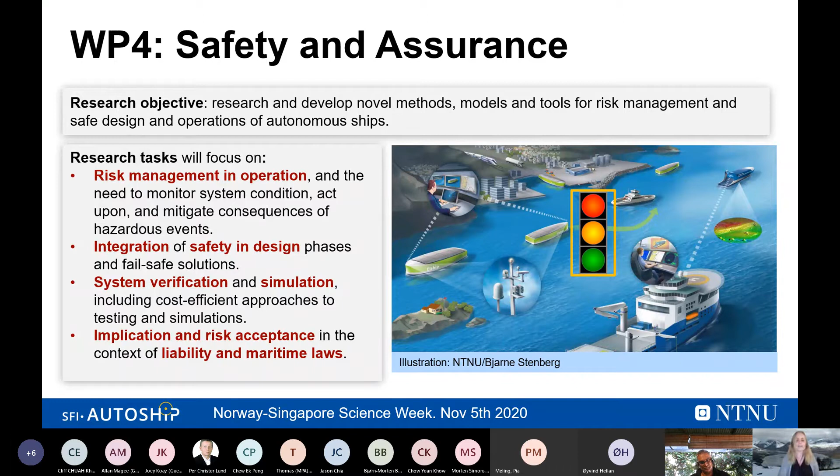The work package on sustainable operation will be the work package where we will focus not only on the ship, but also on the ship as part of a value chain. So here the research objective is to develop the next generation cost-effective and environmentally friendly sea transport system, with focus on the shipping part of a larger system. So here the research will focus on developing better models and systems to do the cost-benefit analysis for selecting the most optimum business cases

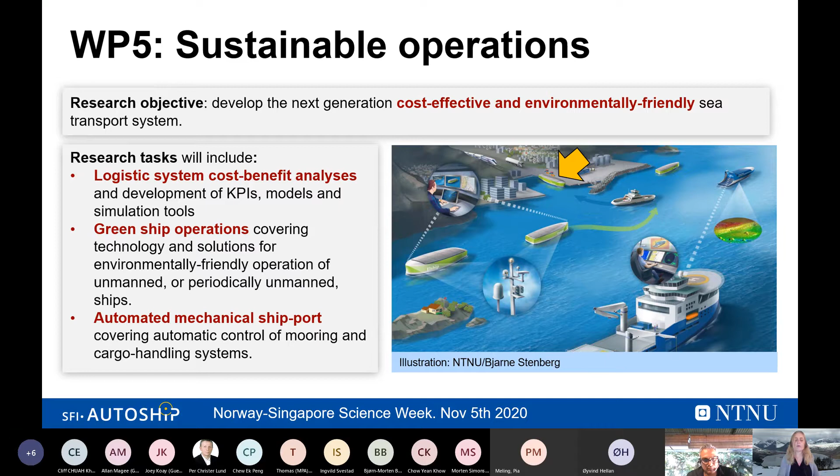with key performance indicators. There will be a focus on green ship operations, how to optimize the solutions considering the different technologies available, both in the case of unmanned and periodically unmanned ships. And what is ongoing in the harbor, it was also mentioned in the previous presentation, looking into some specific technologies and then the methods to raise the level of automation at the ship-port interaction.

Last, I will come back to the use cases, which are very key, and I placed them in the heart of the SFI when I presented the overview earlier. The objective of this task is to demonstrate the applicability and value-adding potential of research and innovation results from the center, and also disclose new problems for further research, because the SFI should also identify new issues to be looked into. So we are now in the process of maturing the use cases. This is an activity we do now, and we will also redo during the center period.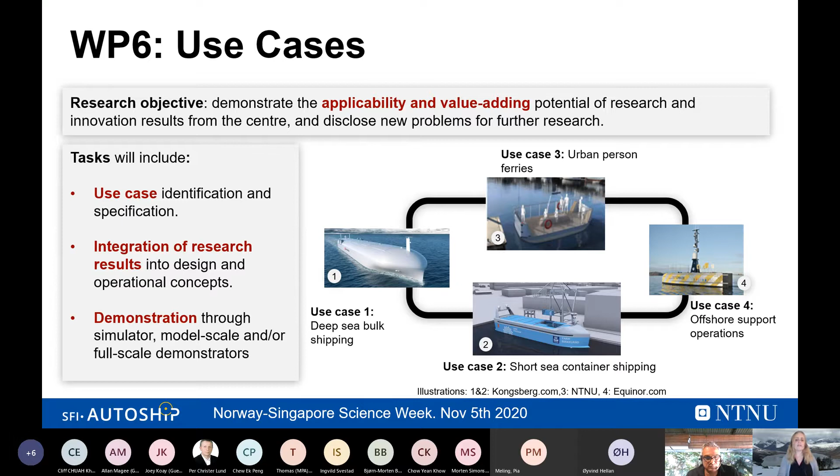We will also focus here on the integration of research results into design and operational concepts, and this is where the partners can link their own activities closely and see how the results can be adapted or applied in my own organization and services. And then demonstrations through simulation, model scale, and/or full-scale demonstrators. That will be, of course, a bit different for the different use cases.

So this was actually my planned overview of the SFI Autoship.